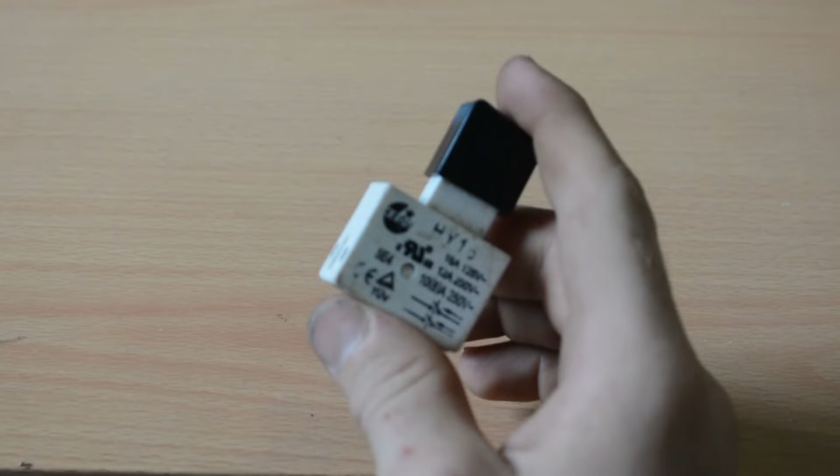So that just keeps the LEDs cool. Second one is a switch. By the way, this heatsink and this switch I already had laying around, so I didn't buy them new. This switch is just a simple, like, button switch. There we go. Okay, just a simple switch, and that's going to be the main on and off. It's probably overkill, I mean, most of the things I use are probably overkill, but this is the only switch I could find that can handle the 20 amps of current that these LEDs are drawing, and it feels nice, so I got them.

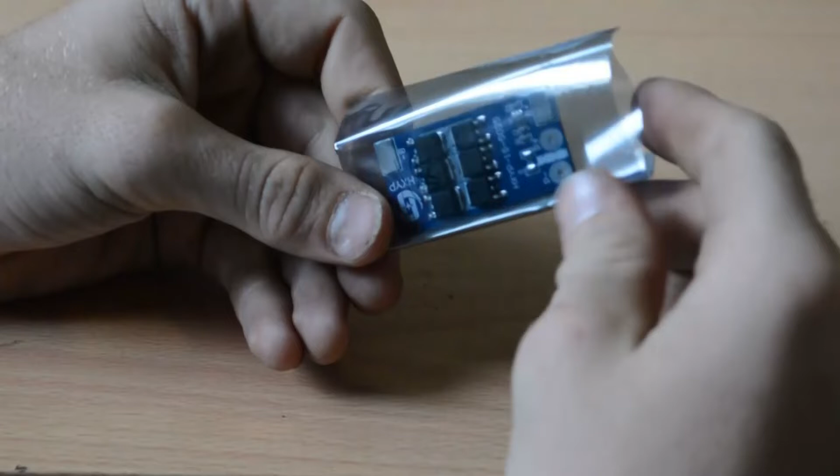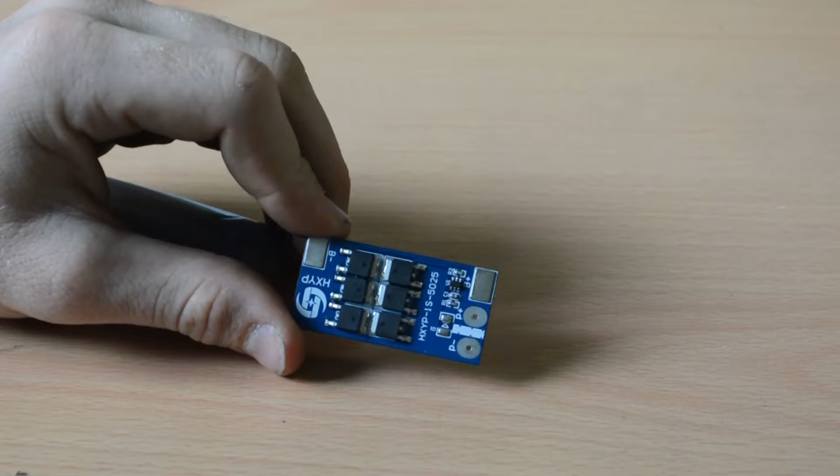Third thing, and probably one of the - well, actually everything's important - but batteries. Now these particular batteries are 18650 lithium ion batteries, and with any batteries, especially lithium ion, they need to be protected with these. These are the battery management system. Basically, a fancy way of saying thing that stops battery going boom. And I need these to stop it from being drained too low, so they don't get damaged or blow up or whatever. I've got 4 of them.

And the last thing, the LEDs. These particular LEDs, I haven't even taken them out of their packet yet. These LEDs are the Cree XHP 70.2 LEDs.

So they're very powerful, and I've got 4 of them also. That's the main components of the torch. As I said, I'm still waiting on the resistors, but they're similar to what the last torch used. With that, I can start designing and printing all of the components and housing, so let's get to that.

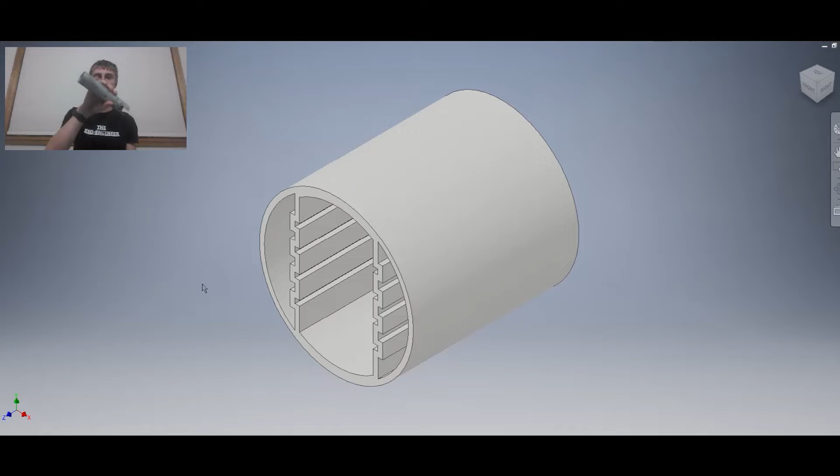Okay, so what I've got here is all the designs of the different components that I need to put inside the torch. And I have this, which is just an aluminium piece of pipe. It already had that slot cut out of it, I didn't cut that, it's just a piece I had laying around. But this is the handle. It's longer than I would have wanted, but it works, it fits the batteries, it fits everything in, so I'm going to use it.

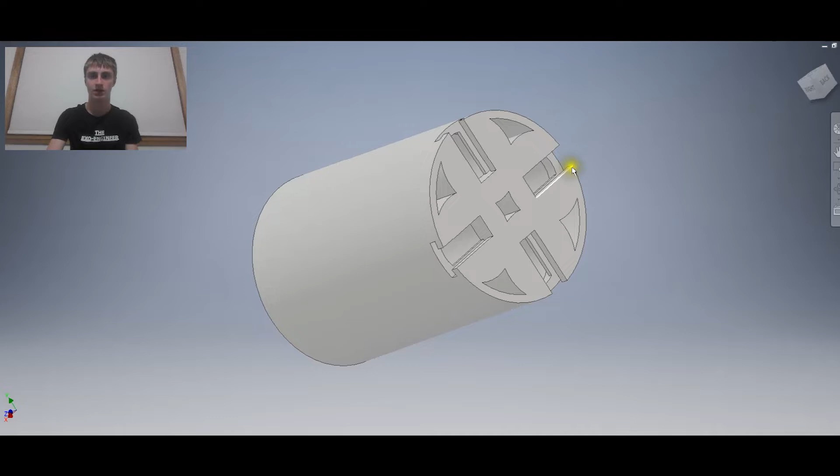So I have designed all of the components. This here is what holds the battery protection circuit boards. They all slot into these little indents here. That's the first one. The second one is the battery slots, where the batteries go. This slides into the pipe, the batteries slide in here, the terminals go into these little sections, and the wires at the other end of the battery come out of these little holes here.

So there's that. Switch housing - this is what holds the push button power switch to turn the torch on. That slides into the handle, and the button slides into that.

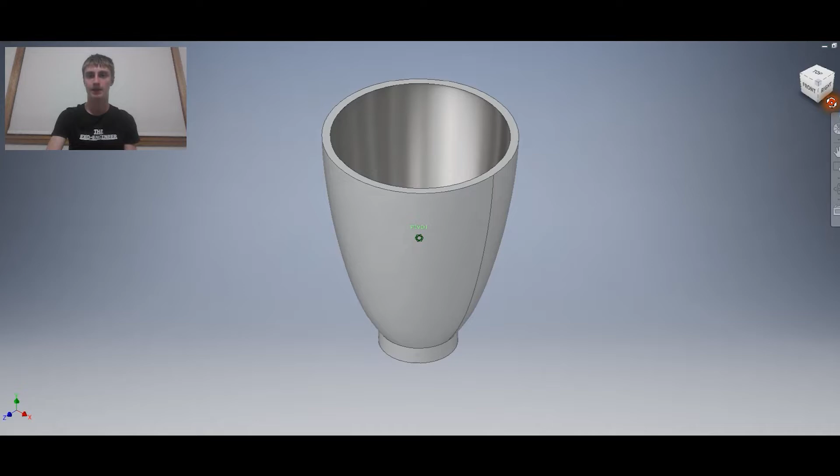This is the reflector for the LEDs. It should be correct, but I'm not 100% sure yet. I have to test it out because I don't have the resistors yet to be able to test the LEDs, so I'm going to have to wait.

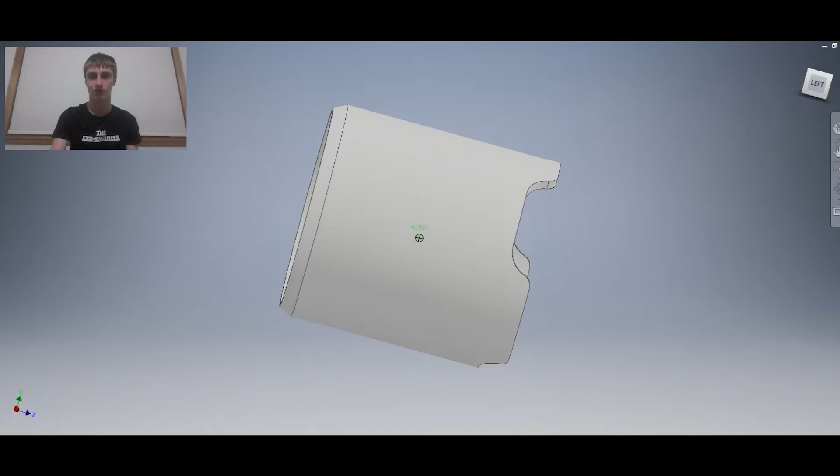And then I've got the battery cover. So this section here slides over this here, only up to about somewhere along there. And then the rest of it, this indent here slides over the end of the aluminium pipe. And then this thread here - this little piece screws into that thread, and then this weird shape in the middle here goes into that.

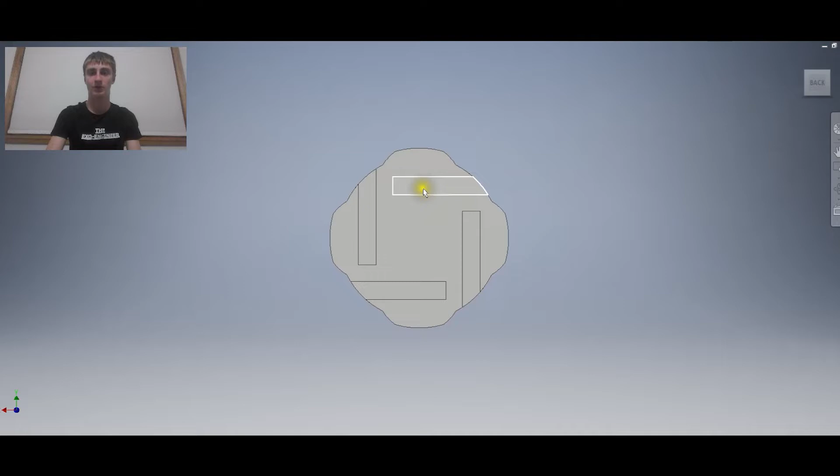Basically what this does is connect the negative terminal of the battery to the front of the battery holder, which is here. So the wires will come through this slot in there.

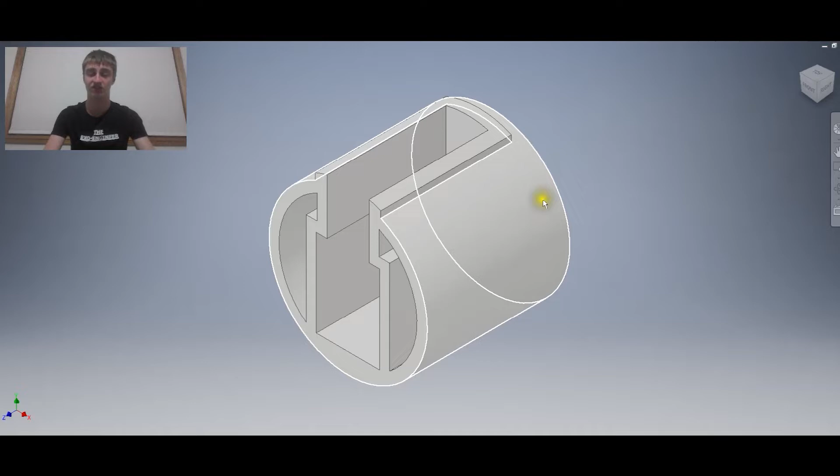So now I'm going to print what I need to print. I need to print this because I have the batteries, and this because I have the circuit protection boards. I'm not going to print this yet because I don't know if it will work with the resistors, since they sit right behind it, but we'll give it a go. The reflectors I can't print yet. This battery cover I can print, the battery cover plug I can also print, and this thing over here I can also print. So I'm going to print those and then come back. See you in a second.

Right, so I've printed all the parts - well, I think all the parts that I can print at the moment. I printed them and cleaned them all up so they fit where they need to go. There's the battery holder, the BMS - the battery management system circuit board holder, the end of the torch with the battery terminal connector thingo, and I dropped it, and the threading plug that goes into the end of the torch. So now I've cleaned them all up.

I need to put all the parts where they need to go. For example, the battery holder, I need to put the terminals in the end. This little green thingo for the battery connections, I need to put all the copper plate in there. I need to put some springs and some wires into these little cavities in the corners, so I can connect the negative terminal to the front of the battery holder and put it all together. So let's go do that.

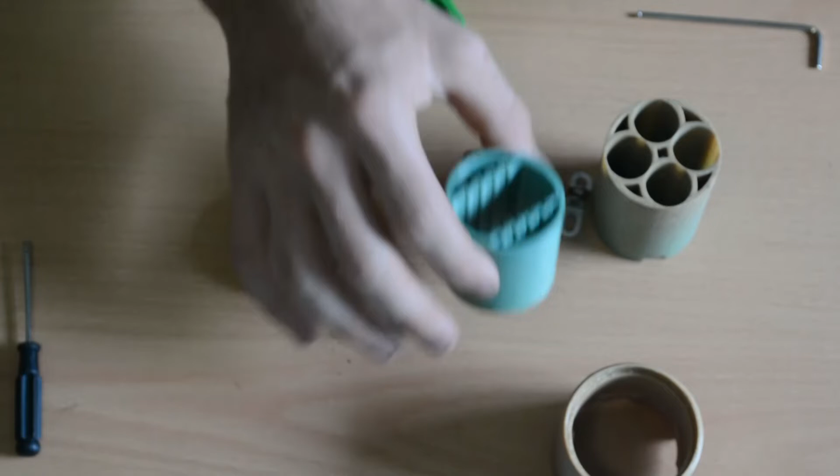Alright, so I've got all my parts here that I need to put together. This, I can deal with later because I don't really need to assemble that as such. These can also be assembled later. And that I will do also later.

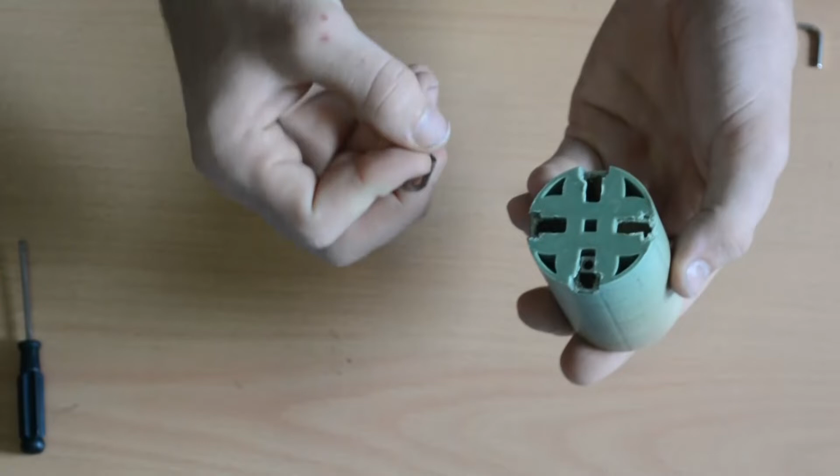What I need to do now though is make this battery holder, or assemble it. So I've got 4 little slots in here, and these little bits of metal need to go into that. First things first, slot them all in like so. Then I drop a nut in each of the holes, and thread this little bolt through.

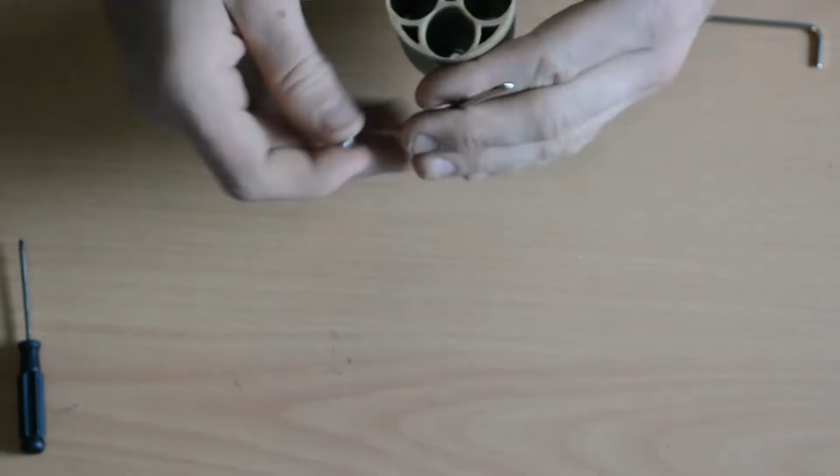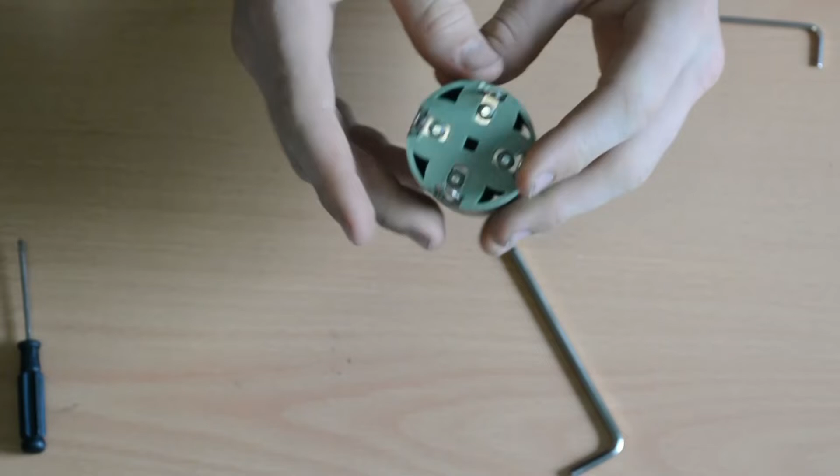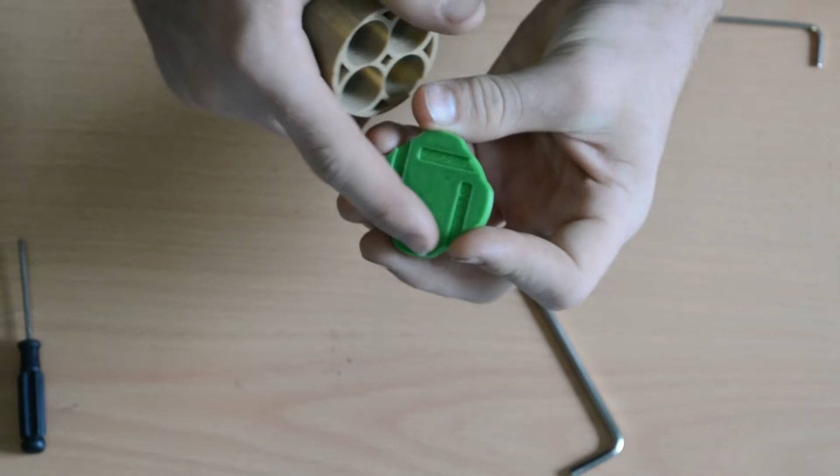So that's all of the terminals in. I will probably put a dab of hot glue on the outside of them just to make sure they don't accidentally slip out. But now I can get to assembling, or gluing down, the copper plates for this thing. So I'll get the copper and do that.

Alright, so I have all the parts here. Here I've just got a little copper plate. It's only really thin, and what I'm going to do with that is cut it with a box cutter. I mean, it's not the done thing, but it's only thin copper, so it's not going to end the world.

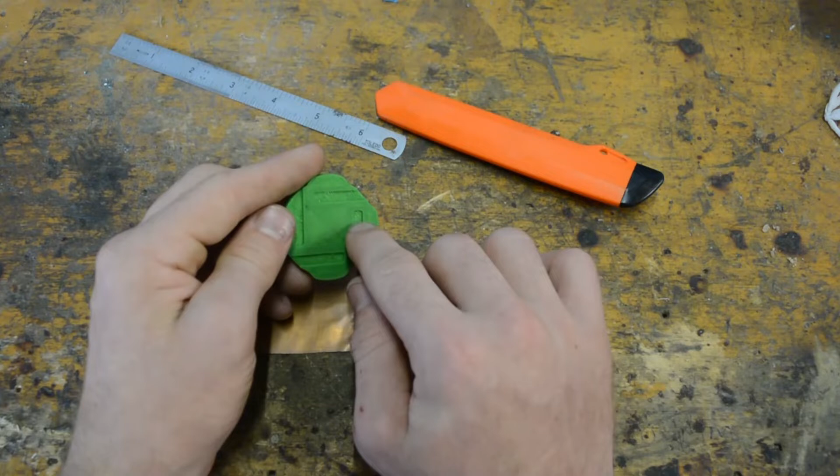So I've got that. I pretty much just got to cut 4 lengths that fit in there, but I need to cut them longer because I need to fold them over quite a bit up here, simply so that can just connect with the battery. So I'm going to do that right now.

There's one little strip, which might actually be too thin. Yeah, a little too thin at one end, but doesn't really matter. And there's 4. So they all fit in nicely, and if I have to, which I will, I'll cut them all down to length. As a matter of fact, probably got to cut them in half. But anyway, we'll see how we go.

So now I'm going to go back up and glue them in. Right, see you up there.

Right, well I'm back upstairs. I kind of got a little bit carried away and already glued the 4 copper strips. Anyway, that doesn't matter, gluing's not that interesting anyway. I also just glued a little square bit of old raft from a 3D print, because when this cap screwed in, it wasn't quite low enough to hold this in place and push it down as far as it needed to go. So I glued that on there. I may need another one, I may not, I don't know, we'll see when we get there. But that's, as I said, just to hold this green thing onto the batteries properly.

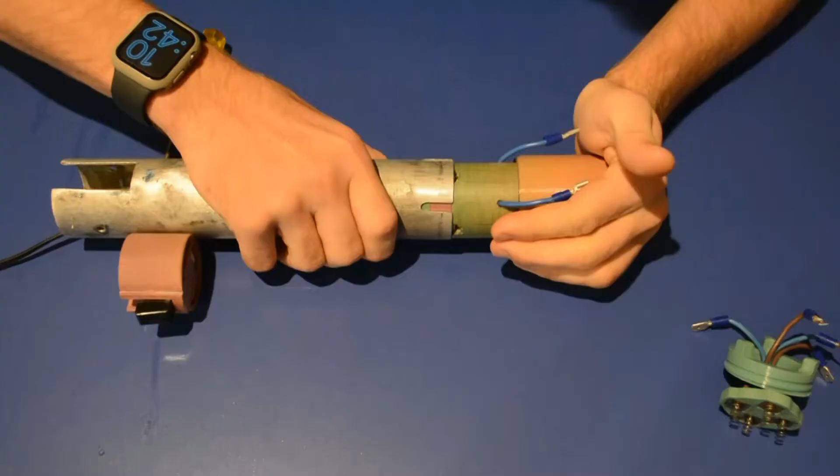Okay, I'm going to pause that there for a second because I want to talk about the handle of the torch and a few problems that I had when designing and actually building it. Now, the main problem I had was with the batteries. You might notice here there's wires sticking out of the back of it and there's wires sticking out here.

I didn't want that to be the case, but after building this little green thing and testing it with the little copper strips that you saw me put in, it didn't work. So I scrapped this green thing and put in a spring mechanism instead.

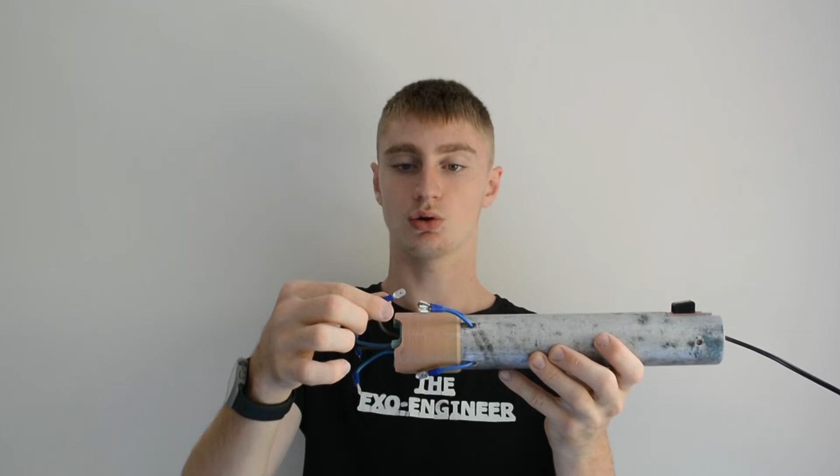The problem was I had to have these wires sticking out the back here and here, but it now actually works. So I put this little spring thing in, get it in, and then this other bit screws into the back, and then I plug all these wires in. I didn't want to do that because that means I have external wires sticking out, which is not exactly a done thing. But that was my solution, and it's not the prettiest, but it does the job, so I'm going with it.

Now the second major issue I had was the battery protection boards. I think what happened is when I plugged these in, it was detecting a short somewhere, because two of them are wired in series, the other two are wired in series, and then those two are connected in parallel. If you don't know what that means, go look it up. Anyway, I think it was detecting a short circuit, so the battery management system boards just shut off and said there's a problem, so it's not going to keep going.

I thought I had a really big issue there, but turns out I didn't. I just have to plug these wires in a specific order, which is weird because it shouldn't have to do that. But anyway, that's the couple of issues I wanted to talk about with the handle, and now I can get on with the rest of the torch. Continued.

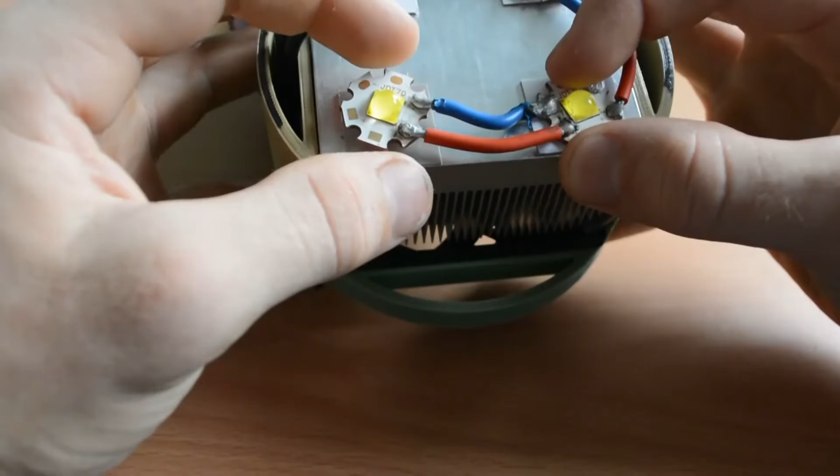Alright, so this is it. I've taped it all up and set up my paint station on the ground. So now I just need to paint it. I did lose a little bit of footage with the actual assembling, which is why it's now up to this stage, actually finished, but you probably didn't see a bit of the assembly. Unfortunately there's nothing I can do about that, so we're just getting straight to painting. So, let's go.

Alright, by the looks of that, looks like I might do 2 coats. It's painted reasonably well. There's a few things I want to fix up and then apply the second coat because there's some scratches and stuff I want to get out. But I'll leave it to dry for about an hour, maybe 2, and I'll come back and give it a second coat. So, back in about an hour.

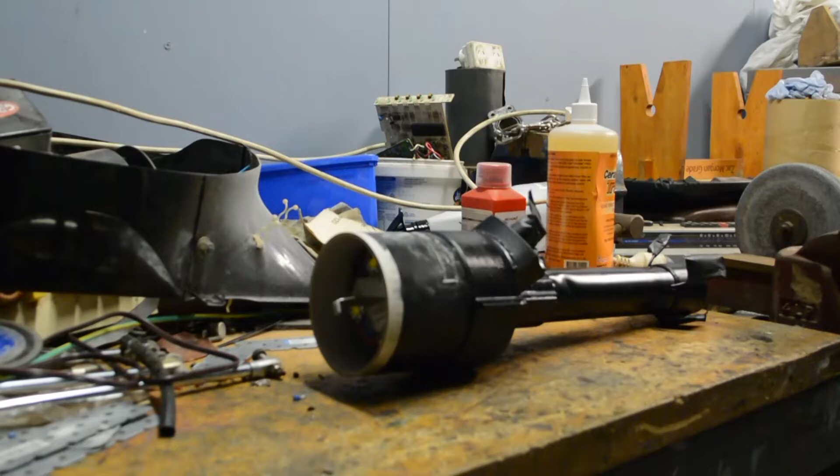Right, I think I got everything this time. So I'm going to wait till it dries, and then I'm going to do the proper test. Oh, I need to cut a slot into the vent. I'll do that when it dries. So, I'll be back in a minute.

Alright, now that it's dry, I need to cut some slots in it for the heatsink. I'm going to cut one in the top and one in the bottom, and put the reflectors back on, peel all the tape out, and that should be done and dusted. So, let's do that.

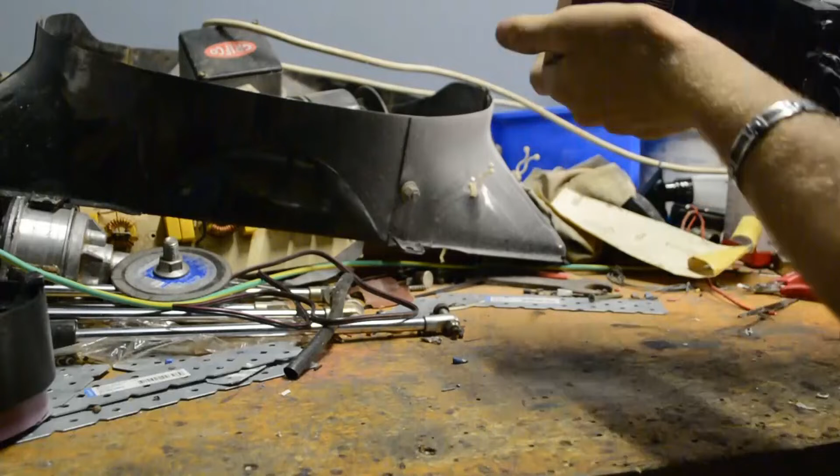Alright, I've cut the 2 lines, covered in plastic dust now, but I've cut the 2 lines and now I need to bust that out somehow. So I'm going to figure out how to do that and I will be back.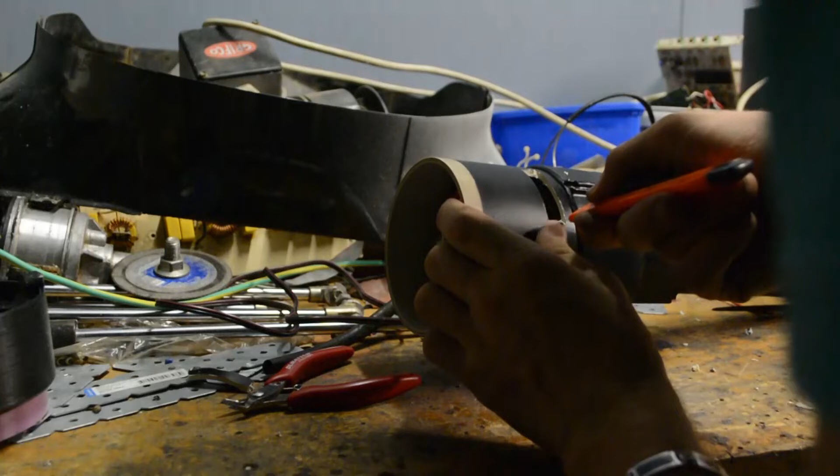Alright, so I've cut the slot in the top and that works pretty well. Now I'm going to cut one on the bottom. It'll probably end up being smaller, but I don't really mind. Yeah, so that top one worked out nicely. Hopefully the bottom one works out the same. So let's go, yes, let's go.

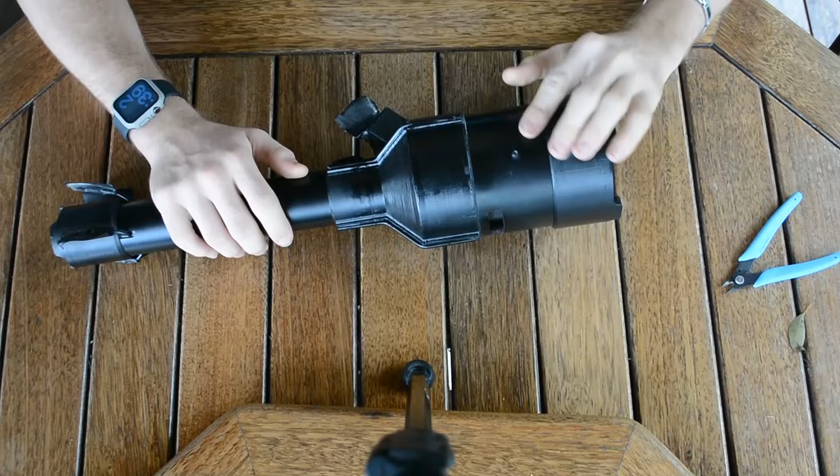Alright, so how I figured out to cut the section out of the last one was use a pair of little side cutters. So I just cut it out and you'll see what I mean.

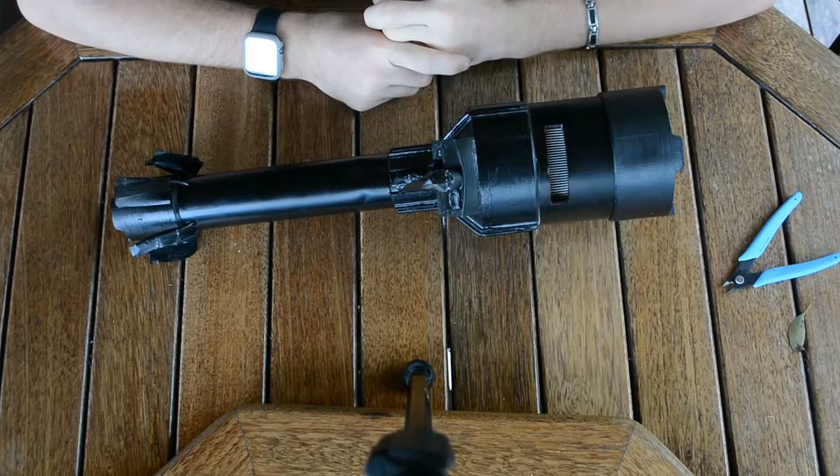Alright, so I got that little piece out, and now it's just to clean up, and for that I use a little utility knife, whatever these are called. Alright, so that's all cleaned out.

Now all I need to do is put it back together. So I'm going to go upstairs and put it all back together and do any final touches, like peeling this tape off. And then I can get to properly testing it. So see you then. Alright, don't mind the birds in the background.

Pretty much all I have to do now is take off all the tape and everything that's there. The tape off the front, tape off all the switches, tape off the back, tape off all the wires. And to be perfectly honest, I think that's it. So let's get to that.